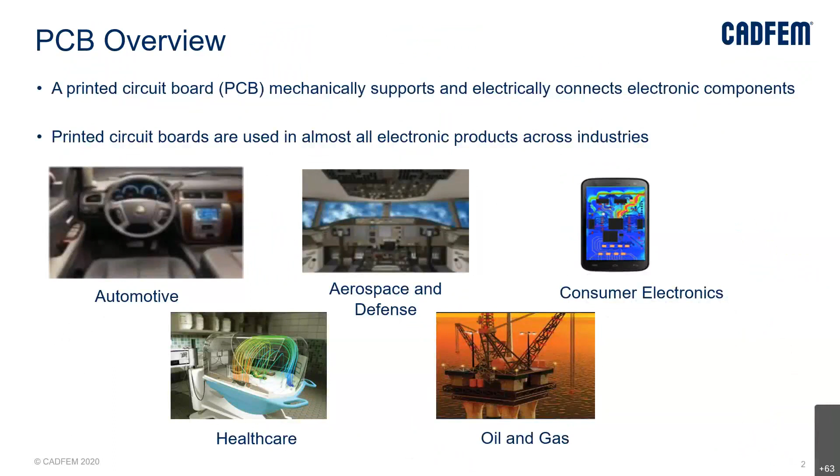So printed circuit boards are used in almost all electronic products. Nowadays, in automotive, aerospace and defense applications, consumer electronics like mobile phones, healthcare, oil and gas, in almost every industry and every vertical you can see printed circuit boards.

So being a PCB engineer, whether an electrical or mechanical PCB engineer, we have to make PCBs reliable. Making PCBs reliable is not only confined to one physics; it has to be reliable electrically, mechanically, and thermally, because PCB complexity is increasing day by day.

Day by day PCBs are becoming more complex. More electronic components are embedded into PCBs, and more complex materials are being assigned. You will find more PCB bodies, solder bodies, chips, semiconductors, capacitors, inductors, more layers, and more complex routing schemes with different via configurations.

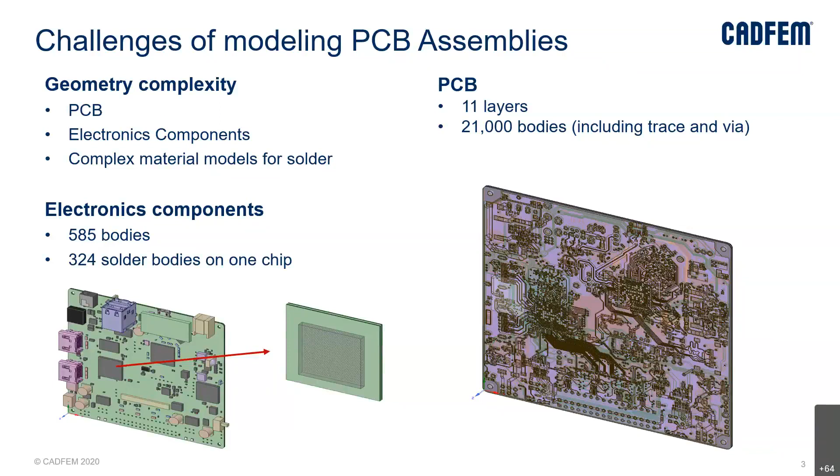That's why it has to be reliable, electrically, thermally, and mechanically. In my presentation I will mostly focus on the electrical reliability of a PCB. My colleague Aslam will talk more on the thermal and mechanical reliability part.

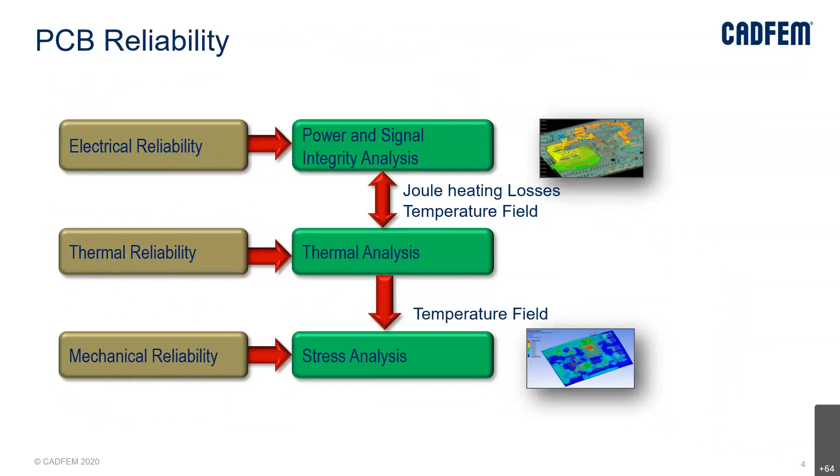In terms of signal integrity and power integrity, in earlier days the clock frequency was very low. Above 100 megahertz we call it the high speed era. When clock frequency becomes high, the signal is attenuated. In the copper traces, the signal would be reflected and distorted, so a number of problems come in a signal.

So to make sure the same signal being transmitted is received, we have to make sure our channel or traces are electrically reliable. That's why we do signal integrity simulation, to ensure that the signal transmission is proper.

Now in a printed circuit board, many active devices are there, like MOSFETs and BJTs. Whenever they switch from logic 1 to logic 0, or logic 0 to logic 1, they draw current or power from the battery. During that process there are fluctuations, also called di/dt spikes, or simply a voltage drop.

So to make sure the power delivery is good, we do power integrity simulation. Improper power integrity and signal integrity give one major electrical reliability problem, known as electromagnetic interference.

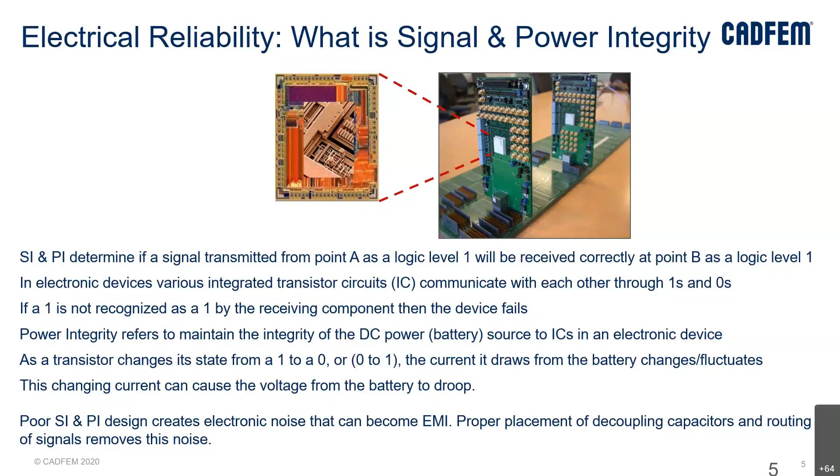Electrical reliability is nothing but electromagnetic interference. Electromagnetic interference is an integration of signal integrity and power integrity, meaning improper signal integrity and power integrity gives electrical reliability problems, which is electromagnetic interference.

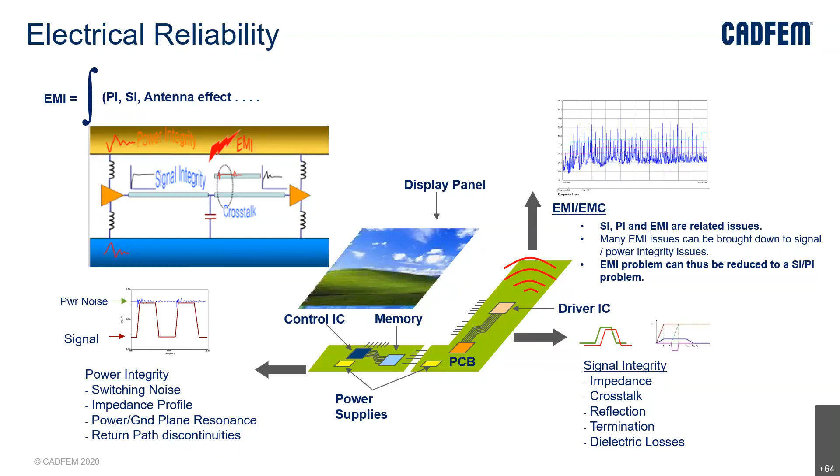There are different simulations in power integrity and signal integrity. In power integrity, we check impedance, noises between power and ground plane, and return path discontinuities. In signal integrity, we also check impedance, do near end and far end crosstalk, reflections, and material losses like dielectric losses. Finally, we do electromagnetic interference simulation.

These are few simulations or techniques that ensure the electrical reliability of a PCB. First is impedance. At higher frequency, the return current follows the least impedance path, meaning wherever impedance is less, the return current will flow there. If impedance is higher, the return current will keep searching for the lower impedance path, and the result would be a larger current loop.

If the current loop is more, from antenna theory it is simple: if the antenna diameter is more, the field effect would be more, the fringing field would be stronger, and the electromagnetic field would be very strong. That's why impedance plays a key role in having better electrical reliability performance.

Some of the fixes are: you can change the stack up, you can change the plane cutouts, and decoupling capacitors can be used.

Hi Prasant, am I audible? Yes, yes, you are audible, Safal. I don't think so. That's what Mr. Suresa is asking me, not audible. Maybe Mr. Suresa, you can just check your audio. Sometimes because of the audio connection you can't be able to listen. I request you to go to the settings in WebEx. In settings there is an option known as test audio, so try to test it. If you can hear some noise, then it's fine. If you can't hear anything, I request you to reconnect your headphone jack. Thank you.

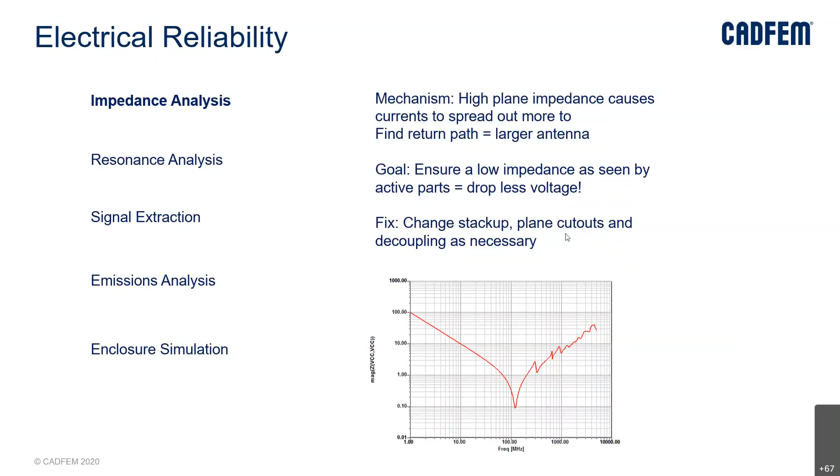So some of the fixes for checking electrical reliability: you can change the stack up, you can change the plane cutout, and you can use decoupling capacitors. This is one example.

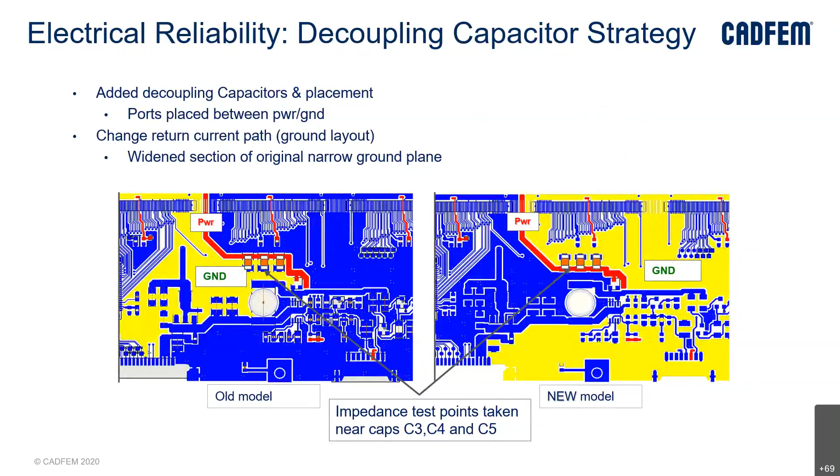After proper decoupling capacitor placement, you can see the impedance of the original layout, which had improper decoupling placement, was quite high and quite noisy. But with proper decoupling placement and improvement, the impedance has been improved.

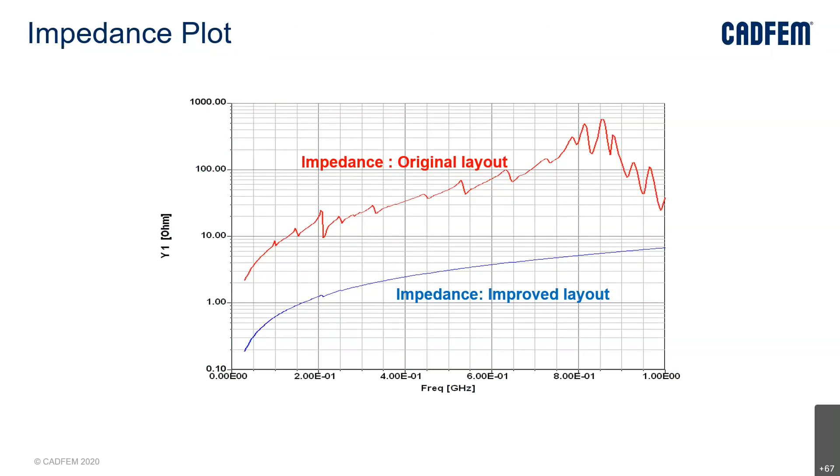So in this simple way, you can improve the impedance profile by simply using stitching or decoupling capacitors. Another simulation technique we call resonant analysis.

In simple theory, a PCB is nothing but a cavity resonator. There is a power plane and ground plane, and between them there will be electromagnetic modes. The electromagnetic energy would flow from one end of the PCB to another end. Now at another end of the PCB, it is an open circuit, and in open circuit, impedance is infinity. So there will definitely be reflections inside the PCB, and that causes the standing wave or resonant phenomenon.

Resonant mode analysis is a very good start for doing EMI EMC simulations, so it's always advised to find the resonant mode in your PCB and try to cure it. It's impossible to make resonance zero, but we can control it using various techniques like decoupling capacitors, changing the stack up, and doing plane cutouts. All these things help improve the resonant mode phenomenon.

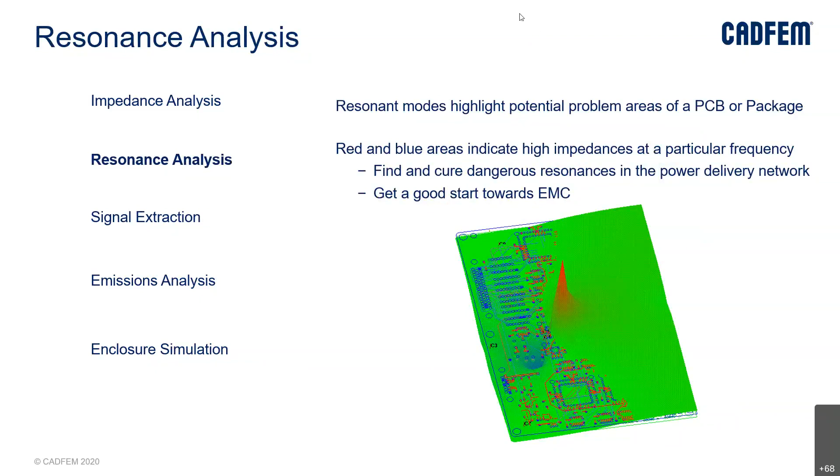Now, after impedance and resonant analysis, the next one is signal extraction. Signal extraction is mostly the time domain simulation, which is nothing but signal integrity simulation, where we run the transient simulation and transmit some bits. So the first step is to extract the PCB, extract the parasitics of the PCB, and then run the transient simulation.

Whenever I say transient simulation, the actual bits have to be designed. So normally people use IBIS and SPICE models for this kind of simulation. If you don't have IBIS and SPICE models, you can model it yourself. You just need to know the rise time, fall time, and so on, and then you can model it and do the signal extraction simulations.

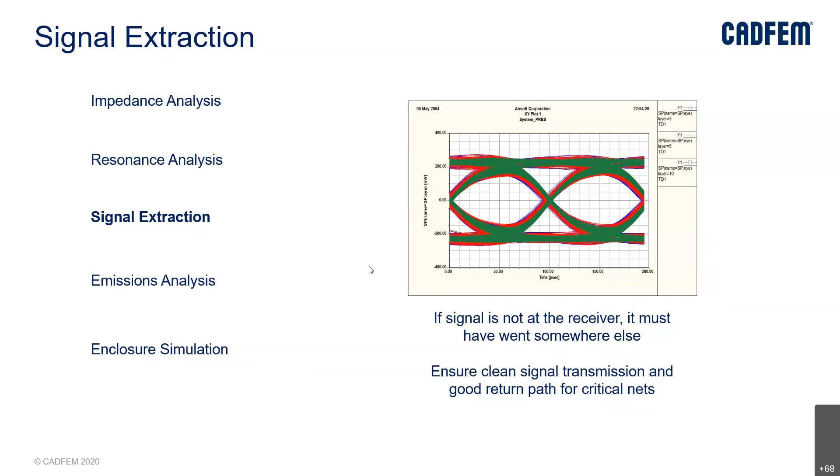So this is just one example. Whenever any signal flows from transmitter to receiver, or any channel, the signal will change its characteristics, meaning it will change its x-axis as well as y-axis, meaning the signal will change its timings. Whenever a signal changes its timings, we call it jitter. In time domain, in frequency domain, it is known as phase noise. Whenever the signal changes its y-axis, we call it simply noise.

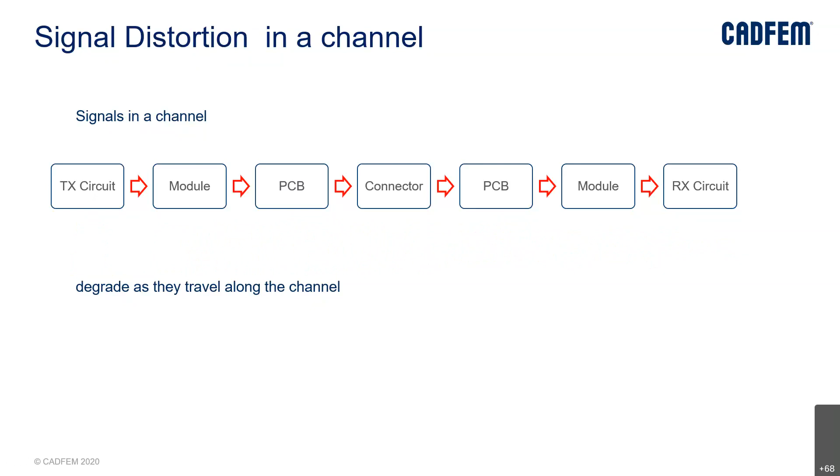So this is the animation, let me just play it. As you can see, whenever the signal flows from transmitter to receiver circuit, the signal becomes different, right? So that means the signal degrades as it travels along the channel. This kind of reliability prediction also can be done.

And you can just reconstruct high-speed channels. You can have your transmitter, multiple PCBs, multiple connectors, transmit circuit, receive circuit, and then you can do the simulation. So this is the near field visualization.

Just one example. At low frequency, you can see there is no field. At high frequency, as you can see, the impedance is also higher. You are also seeing the electromagnetic fields.

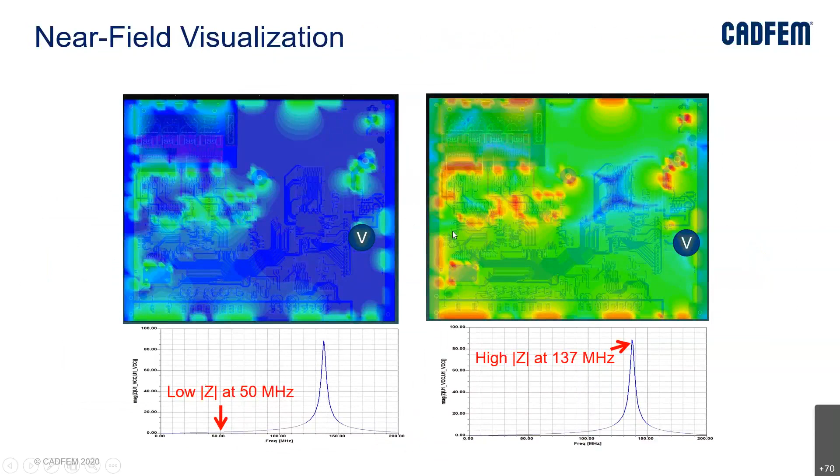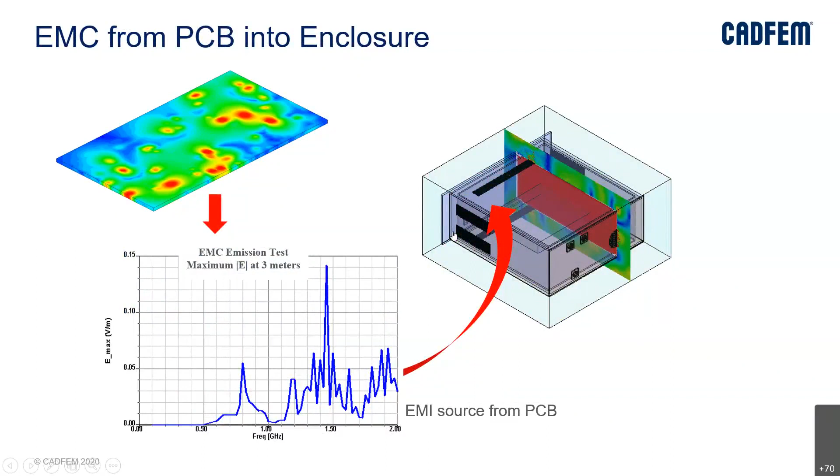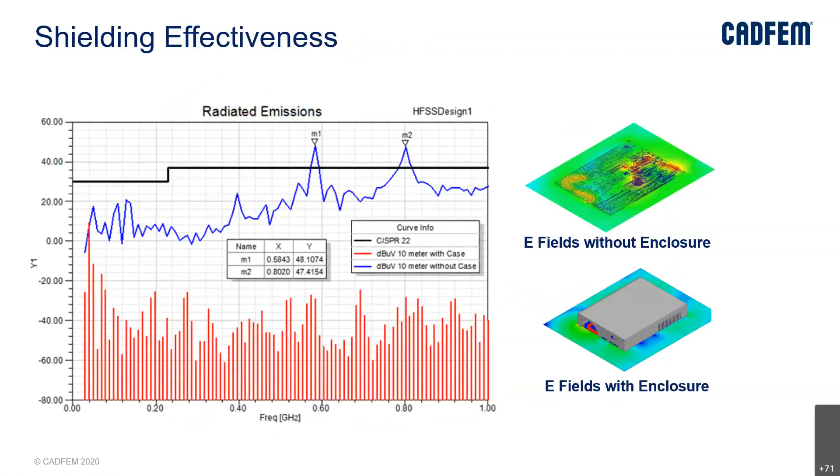And yes, you can also do a 3D enclosure simulation. You can just put the PCB inside a 3D enclosure. We call it shielding simulation, and then you can predict the shielding reliability also, how good the shielding is. As you can see, the top one is without enclosure, the electric field is quite high, and the bottom one is with enclosure, the field has been shielded. So this kind of shielding simulation also can be done.

Now, as I told in the beginning, whenever we talk about PCB reliability, it is not only electrical reliability, but multi-domain or multi-physics reliability. Now, there is a phenomenon known as Joule heating.

So whenever electrical energy flows in a trace, some energy would be radiated out as electromagnetic energy. We call it EMI, or antenna theory. Some energy would couple to the adjacent traces, we call it inductive or capacitive coupling. Some energy would be absorbed by the material, we call it loss, or a lossy line.

And some energy would be dissipated out as thermal energy. We call this process Joule heating. So Joule heating is nothing but conversion of electrical energy into thermal energy, and Joule heating will always be there.

Now if you see from the formula Q equals I square R, in a mobile phone also, whenever you use WhatsApp and all, your mobile phone won't be heated up that much. But whenever you start using the mobile phone in a high performance manner, if you start playing high-end games and all, your mobile will be heated up. This is because of this formula I square R.

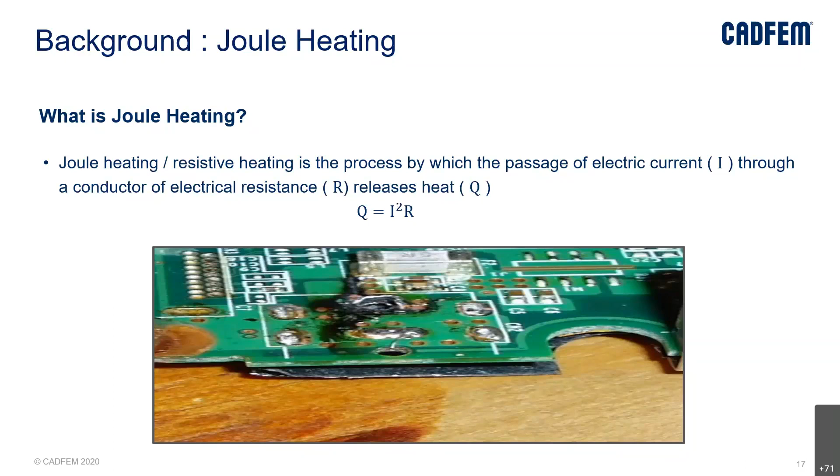Because R is majorly constant, the current drawn from the battery becomes very high if you play games, so the released heat is very, very high. That's why proper thermal management has to be done. That's why a PCB has to be reliable electrically as well as thermally.

Now in the ANSYS platform, we have something known as electrical thermal coupling. So for doing thermal simulation, we need some source, as I said, Joule heating. According to the law of conservation of energy, energy cannot be created or destroyed, it will change from one form to another. So the source for thermal energy is the electrical energy.

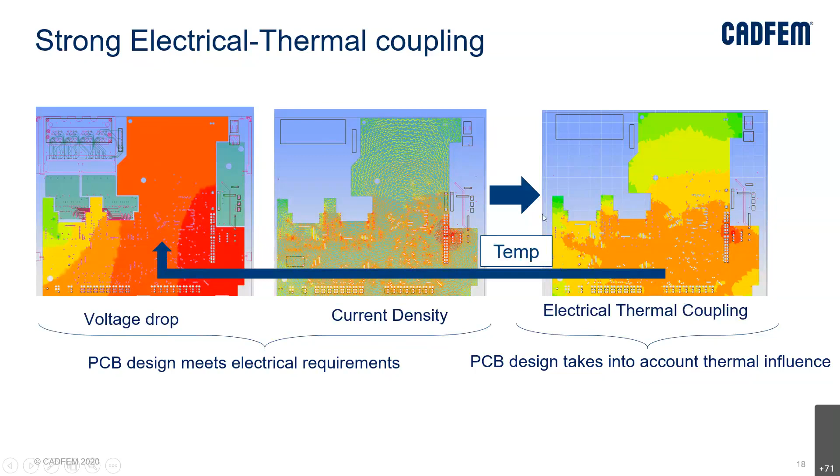Meaning whatever electrical losses occur, whatever power dissipation occurs, that acts as a source for thermal. So in our tool, there is something known as electrical thermal coupling, where you can run the electrical as well as thermal simulation in one GUI, in one platform. The power map or the electrical losses would be taken to another CFD solver, which will compute the temperature. This temperature will be taken back to the electrical solver, which will again calculate the electrical losses considering the temperature also. Now this second result comes.

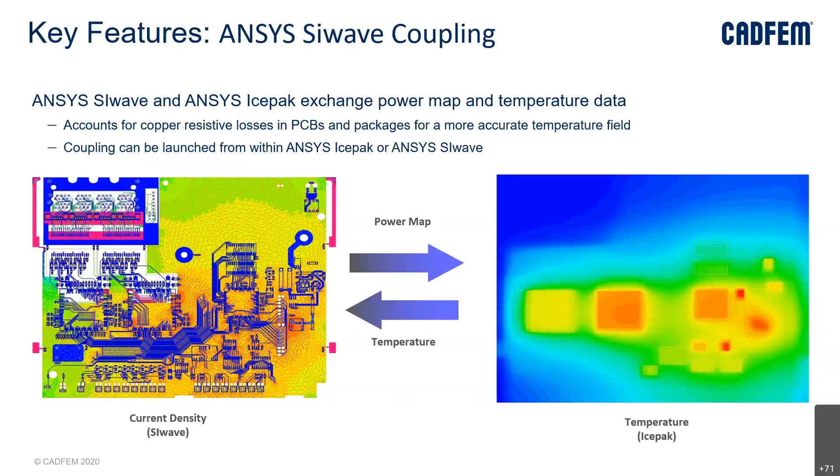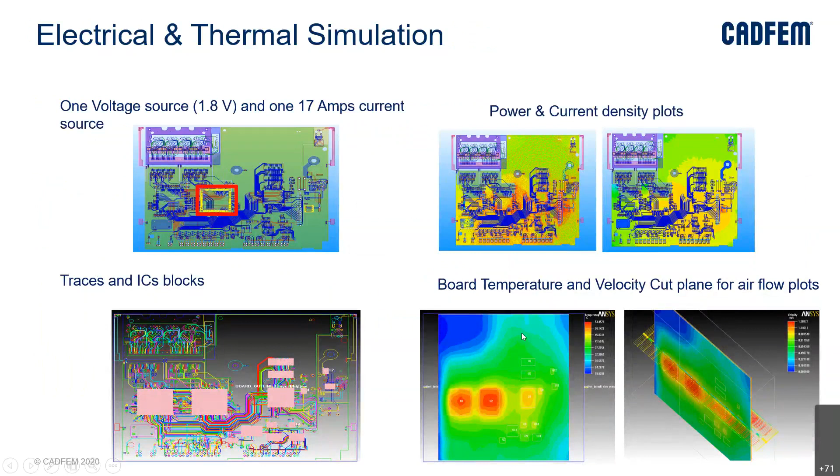The second losses would again be taken to CFD. It will again compute the thermal considering the previous electrical and thermal losses, and new thermal data would be generated. Then it will be taken back to the electrical tool, which computes the electrical losses again, considering the second thermal result. So it is an iterative process; two or three times you can run it to get the electrical losses, overall board temperature, and velocity cut plane. This is one typical example of temperature display.

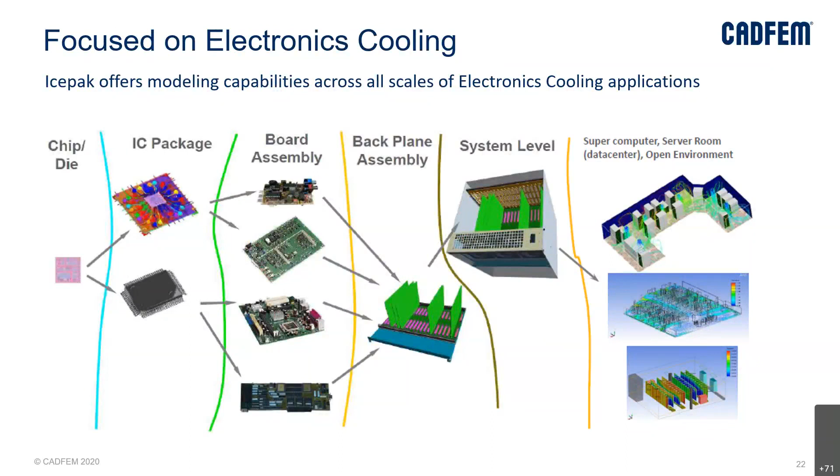We also have a dedicated tool that focuses on electronic cooling. Sometimes excessive heat is generated, so you have to do thermal management, select heat sinks, and so on. Starting from a chip die to an IC package to a board assembly to a back plane assembly up to system level, you can do electronic cooling simulation. Icepak is a dedicated computational fluid dynamics solver, but it has been customized for electronic applications, so you don't need a very good CFD background. Even being an electrical engineer like me, you can do the thermal simulation.

Some features include fluid flow, laminar and turbulent, conjugate heat transfer, conduction, convection, radiation, and Joule heating - all four kinds of simulations can be done. It supports popular CAD import formats and has different macros, predefined fan models, heatsink models, and so on. You can import EDA and ECAD files. There is optimization as well, and now it has been integrated into the AEDT environment, so you can just do the optimization and run the simulation.

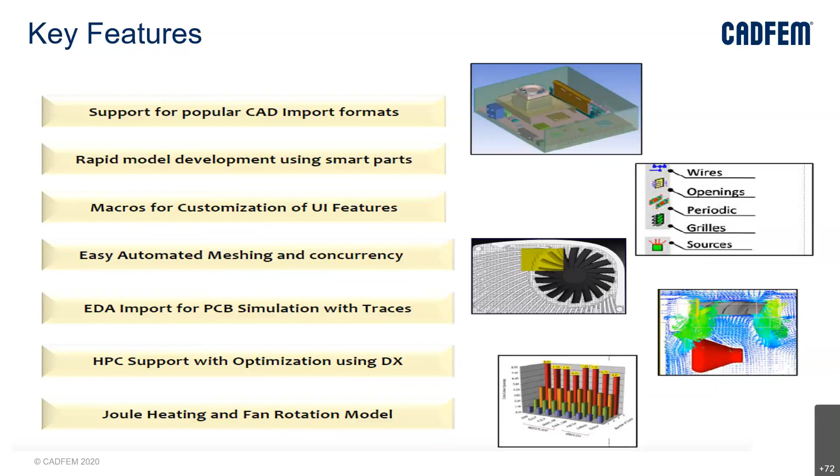As I said, ANSYS is a multi-physics platform. So electrical losses would give thermal fatigue, and thermal losses would give mechanical fatigue - we call it workmanship violations or mechanical deformations. So all these electrical losses can be related to thermal losses, and electrical and thermal losses can be related to mechanical losses or structural deformations also.

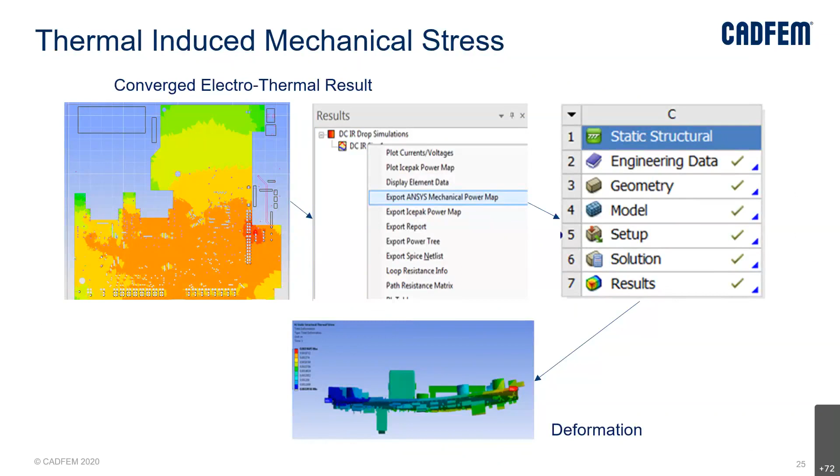This phenomena we call board level warpage. There is something known as coefficient of thermal expansion, or CTE, which decides up to what point the structure will retain its reliability. After the CTE threshold is met, after the temperature surpasses the CTE value, the structure becomes deformed in its shape. There will be different CTE values in a PCB since different materials are present. That's why during PCB fabrication, there are chances that some contacts would be dislocated, some soldered joints would be disconnected, and that's why board level warpage can also be simulated.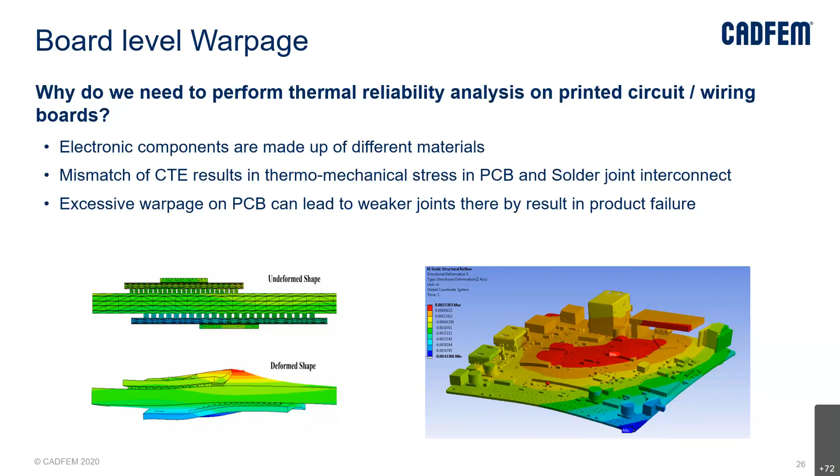Aslam would be talking more on this kind of mechanical simulations. I just want to give a good start for Aslam to take up the presentation now.

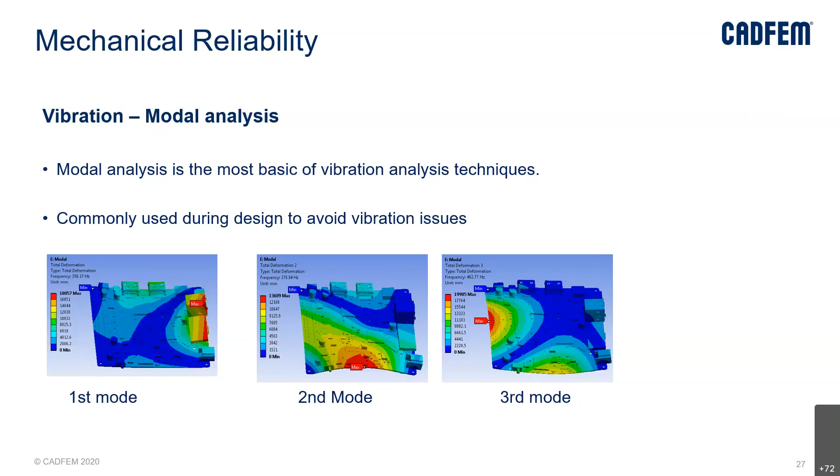Another simulation is mechanical reliability. There is normal mode, also called normal vibrations or modal analysis - the first mode, second mode, and third mode can be done; it's a simple simulation. There is also something known as random vibrations. Random vibration is like my body having some natural vibrations, and the environment also having some vibrations that are random in nature - mathematically we can't actually represent it. But sometimes our natural vibrations can pick up the frequency of the random vibrations; that phenomenon we call resonant mode, or resonant phenomena. So these random vibrations can be simulated in ANSYS mechanical.

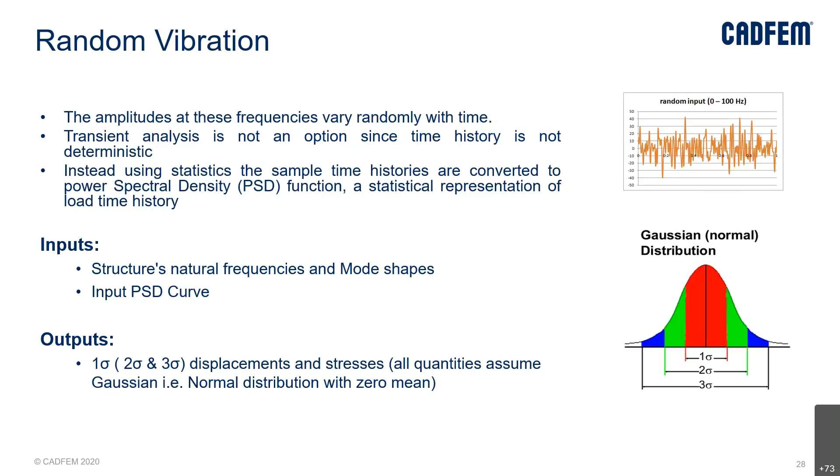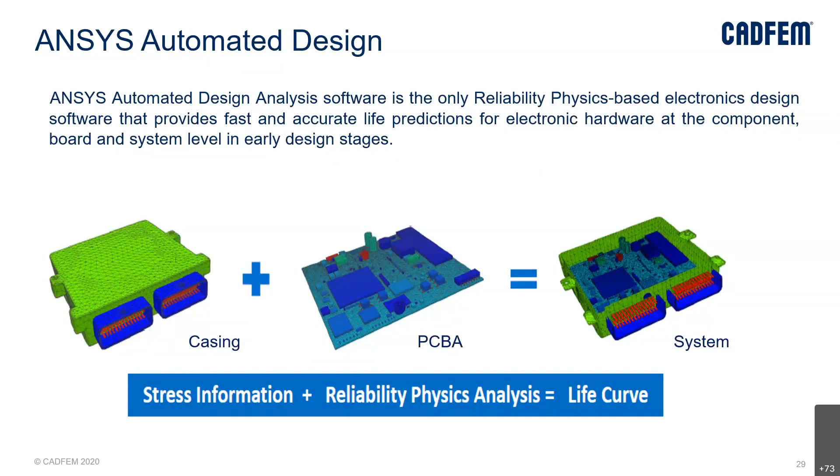You can give input as a PSD curve, and in terms of output, 1 sigma, 2 sigma, up to 3 sigma you can take - it is a Gaussian distribution, and you can check this kind of results. Normally electrical, mechanical, and thermal losses give rise to reliability problems, or what we call the warranty problem, or mean time to failure. So this kind of life curve prediction can be done considering these electrical, mechanical, and thermal losses. Aslam would be talking more about this kind of simulations.

Just to summarize my presentation: ANSYS is one platform where you can do electrical, thermal, as well as mechanical simulation now, as well as reliability prediction.

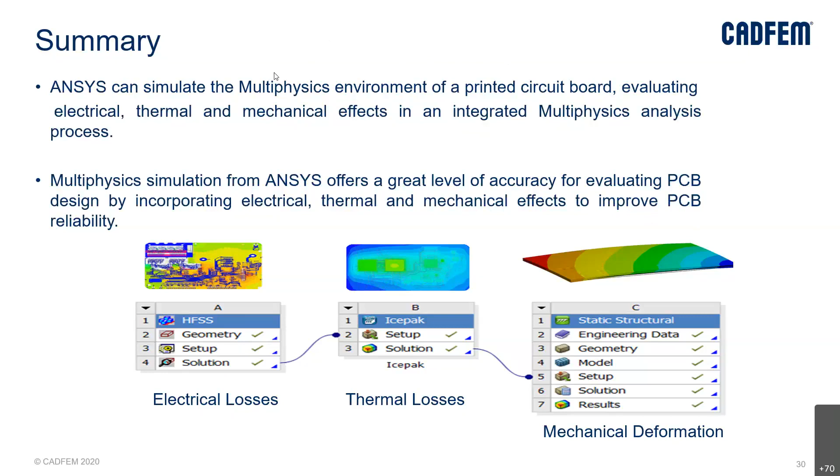Okay, yeah, thanks. Thanks, Safal, for that. Yeah. Okay, Aslam, there is one question related to MTBF, mostly Sherlock. So maybe after you end your presentation, you can address that. Okay, I will address that also. Over to you, Aslam. Thank you. Okay, I am just sharing my screen. Just give me a minute. Can you see my screen? Yes, it is loading. We can see. The presentation view as well, right? Yes. Okay.

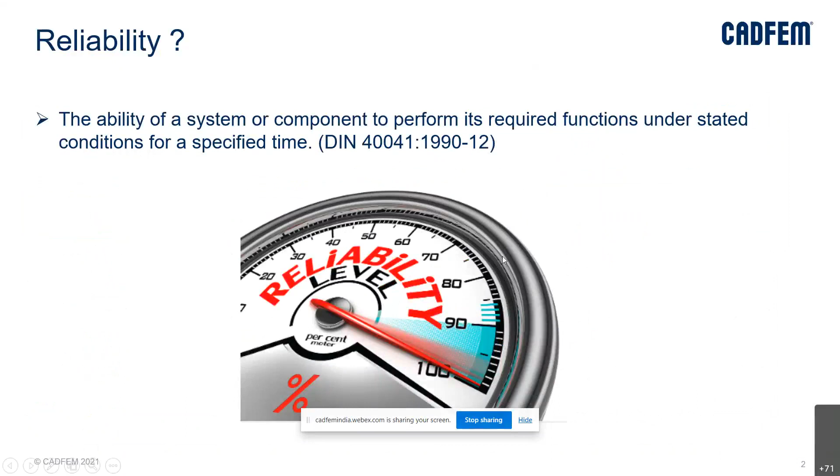So according to the US Air Force... Sorry to interrupt, Aslam. Could you please go to the presentation mode of the PPT? I think I'm in presentation mode only. I think this issue is because I'm just sharing my application. I'll share the complete screen. I have this issue multiple times. If I share the application, the screen will not change. Understood. Now you are able to see it, right? Yes, perfect. Now the slides are changing.

Okay, so according to the US Air Force, out of most of the failures we are seeing, 55% are because of high temperatures and temperature cycling. Not only just temperature, but because of the temperature cycling, the fatigue. Because of that, we saw 55% of the electronic failures, and 20% because of mechanical vibration and shocks. So for this, ANSYS provides a full set of tools to model the entire PCB assembly efficiently to understand the failures.

So for that, ANSYS has its automated design analysis tool called ANSYS Sherlock, which is the solution for reliability analysis. It will translate ECAD easily to CAE files, so it is a powerful preprocessor. Any ECAD you can just convert into CAE files, with some powerful preprocessing capabilities. Also, it predicts product failure, so it has a powerful post-processor as well.

And every engineer can use it easily because it has a very short learning curve and a very good user interface, and you can do design for manufacturability. You can even predict product failure at the component level, board level, or even the system level, with the PCB along with the enclosures.

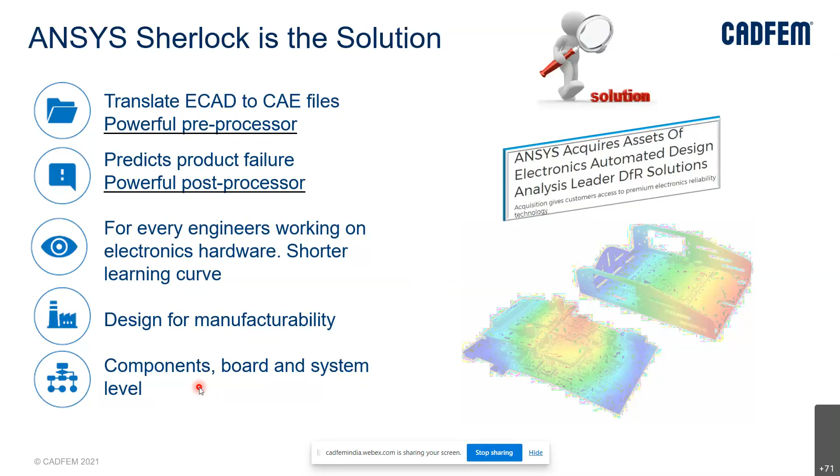So what is the Sherlock? Sherlock is the only physics-based reliability tool which will account for the failure because of your physics, that is, because of your thermal shock and your vibration. It will predict the failure early in the design stage, quickly and accurately, and it is electronics focused, basically used in all electronic industries, whether automotive, aerospace, or any consumer appliance electronics.

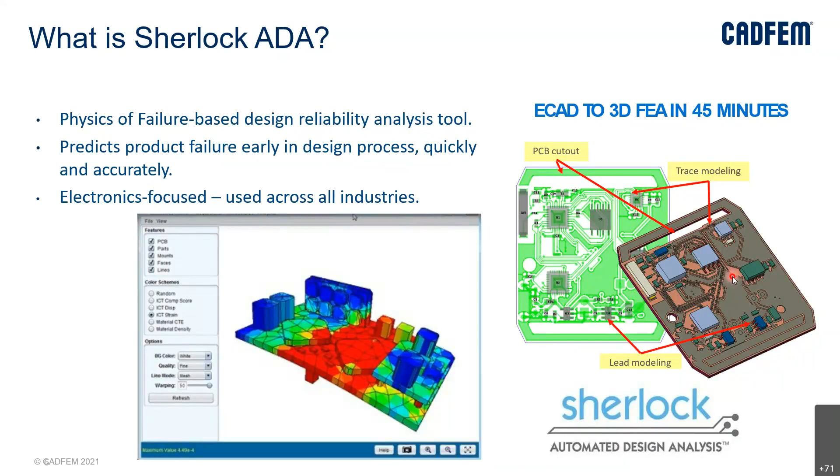So here you can easily convert your ECAD file, which is the layout, say like ODB++ or other formats. You can directly convert it into the CAE or FEM model. I will explain much more about these things in my next slides.

So before going to that, we should understand what are the current challenges we are having in terms of reliability analysis. In the previous presentation, we saw the temperature, voltage, current losses, and how much temperature is going to rise. We saw certain strain bending in the boards. But the information we got was temperature, voltage and strain itself. That doesn't relate with the reliability.

So for that purpose, we have to take that stress information and use the reliability physics analysis to get the life curve, which will explain the reliability of the component or the board for the specified time frame. Reliability physics analysis is an engineering product development methodology that applies knowledge derived from the physics of failure. So we actually take the physics of failure procedure to calculate the life curve.

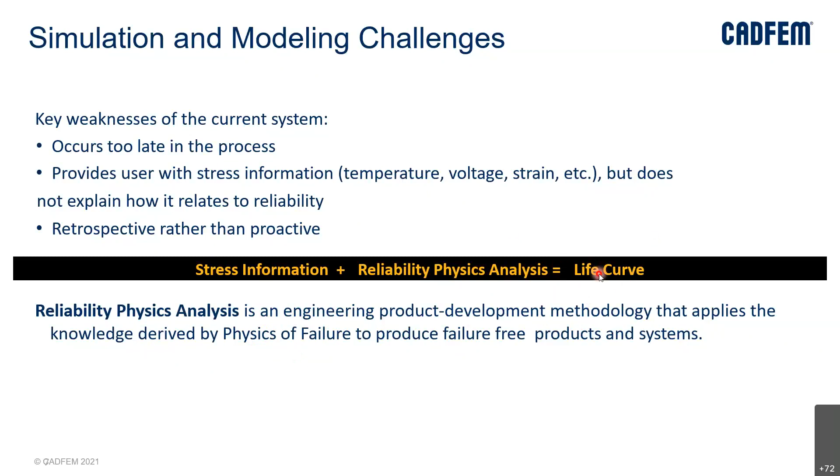So with that, we have three phases to get the reliability aspect in ANSYS Sherlock. One is data input, phase one, where you can easily pass the standard EDA files like schematic, layout, the part list, your BOM, everything you can automatically import into ANSYS Sherlock.

Then with the embedded libraries which we have, like part libraries, package libraries, materials, solders, and laminates for boards, we can use those embedded libraries to model or define each and every part correctly, each package correctly. Then we can easily build a box for finite element analysis in a few minutes. All this comes under the first phase, which we call input, or pre-processing.

Then what analysis can we perform in Sherlock? Basically there are different assessment options with which we can do the reliability analysis. It covers thermal cycling, mechanical shock, natural frequency, and linear dynamic analysis for harmonic and random vibration.

Certain non-FEA analyses are also possible, like integrated circuit wear out, that is, semiconductor wear out, thermal derating, CAF simulations, solder fatigue, or ICT, which is again an FEA-based analysis, in-circuit testing, where you have different test points to check whether a particular load, a force or a displacement coming onto your PCB board, is going to be sustained or not. And along with that, DFMEA, design failure mode and effect analysis.

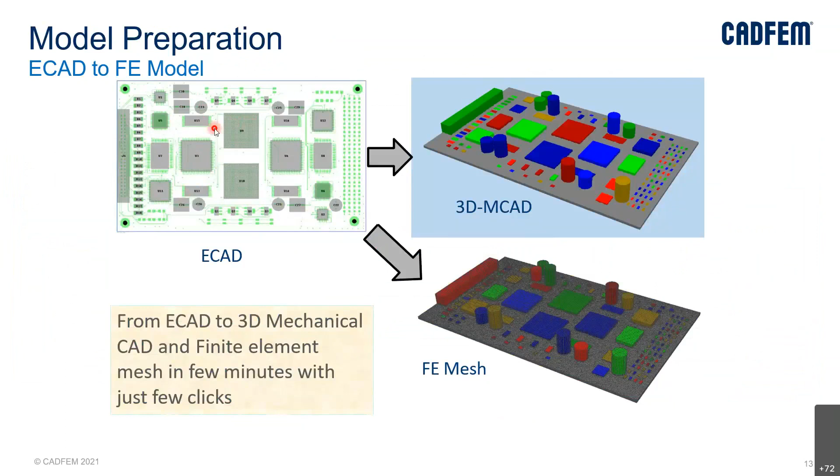Then once we have imported the board, with all the layouts and part locations with respect to part designators, we have our embedded populated library of parts, in which you can check the manufacturer name, and with respect to that you can update the parts according to the part library available in ANSYS Sherlock. So all the material properties which are required to do different analyses are applied there directly and assigned properly.

Suppose you do not find anything there, you can manually change certain properties in ANSYS Sherlock, or you can create your own part library which you can use for further analysis. That way you can create your local library and also use the global part library in ANSYS Sherlock.

So for all the part properties, as you can see here, different part properties are required, like ID, which gives you the designator, and other things like packages. We have a package library as well with respect to surface mount packages or through hole packages. So you can see here you can choose from multiple packages.

Yes, Aslam. So there is a request from the audience for you to speak a little bit slower. Slow. Yeah. Okay, I'm going fast. That is okay. Okay, I'll go through slowly. Okay, thank you.

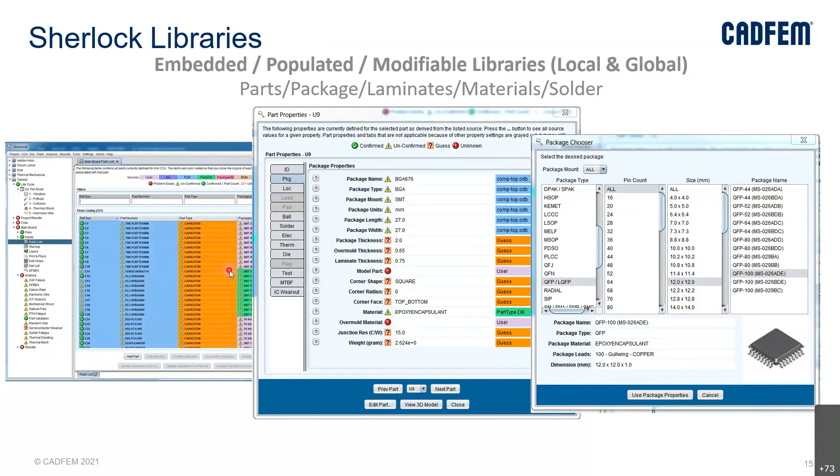Then the next thing: once you create your part library properly and the package dimensions are taken care of, the next important thing is the Sherlock life cycle condition under which you want to test your PCB board. Here we can create multiple shock events. You can define what kind of shock you want to check, whether it's a sawtooth or a half sine, the duration of the shock in milliseconds, and the number of cycles you want to apply over the testing period.

You can also specify the directions. If you want to check different shocks in different directions, you can create multiple shock events and test on all of them. Then there are harmonic events. Similarly, you can create harmonic profiles. You can edit your profile or load your existing profile directly into ANSYS Sherlock, with the duration and number of cycles you want to apply.

Not only shock and harmonic, but also random vibration analysis, which Safal showed in one of the slides, where, for example, during transportation the board experiences random vibrations. You can create that random vibration profile and apply it. So you can create multiple profiles of shock, harmonic, and random as well.

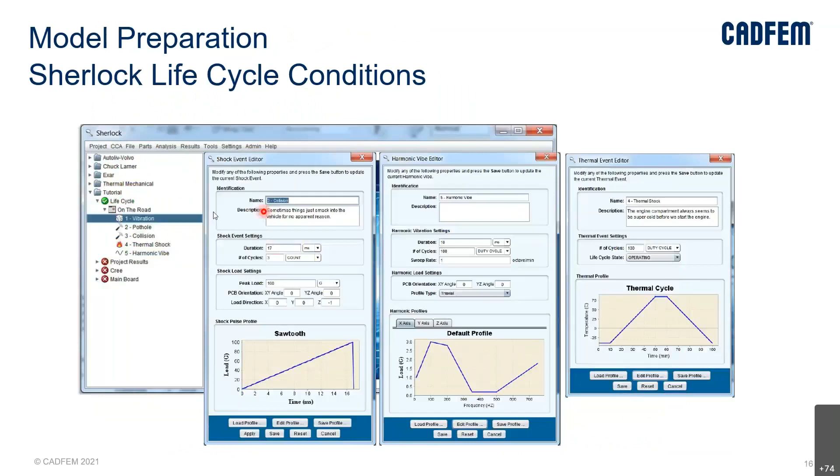You create that one cycle and then apply a number of cycles, say 100 cycles, to your board, and you can check what the strain levels are and what the reliability of your components is under these particular thermal cycles. So these are the life cycle conditions you can prepare here and use for subsequent analysis.

Under the standard capabilities, you can do solder fatigue analysis, which is based on strain energy. The failure is based on the strain energy under the applied thermal or vibration loads. Then you can do thermal mechanical analysis to get the strains at each and every location of your board. At the same time, we can do in-circuit test analysis.

This is a basic, simple structure analysis, in which you have multiple test points on your board. You can apply certain forces or displacements at those locations, and you can check the in-circuit test analysis.

Another non-FEA analysis is the plated through hole fatigue, with respect to IPC TR579. Basically, we have certain plated through holes in the board, which are electrochemically plated with conductive metals. Copper is the conductive material you are going to use, and this is used for electrical connection between the different layers.

So we can do the fatigue analysis of these plated through holes, in which you get the stress calculation first, and based upon the stress we get the strain, and we can determine the lifetime based on the strain which we have calculated under the thermal loadings.

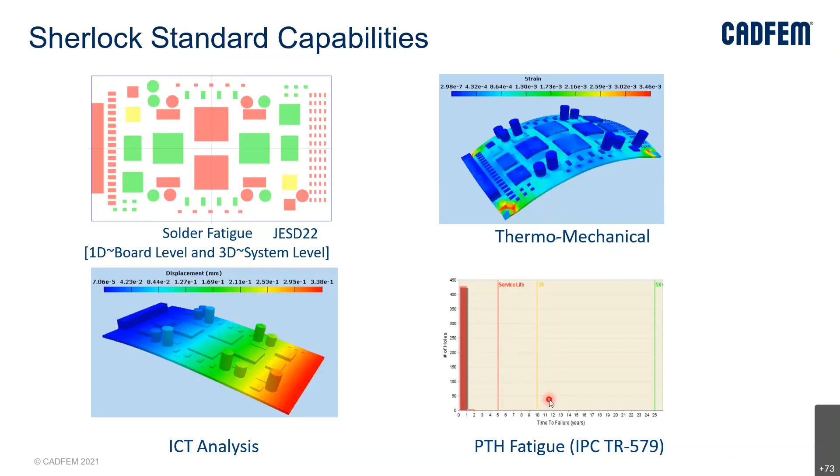Then under the dynamic analysis, we have the natural frequency analysis, which is the most important and basic analysis in linear dynamics, which tells us the natural frequency of our board. Why is natural frequency important? We have our excitation frequency. If the natural frequency of the component matches your excitation frequency, you see resonance and the amplitude of vibration increases. We see failure.

So before going to any other linear dynamic analysis, we must understand what the natural frequencies are, and whether they fall in my excitation frequency or not. And then we can do the harmonic analysis. Basically, it's a frequency sweep analysis where you can define a certain frequency range, and with certain amplitude you can check the harmonic analysis along with a certain MIL standard. So you can use that MIL standard as a reference, and you can replicate that complete procedure

in ANSYS Sherlock itself. Similarly, you can do the shock analysis, under which Sherlock will perform the transient analysis. It will calculate the strain, compare it with the strain limit for each component, and depending upon that it will give you the time to failure for that particular component.

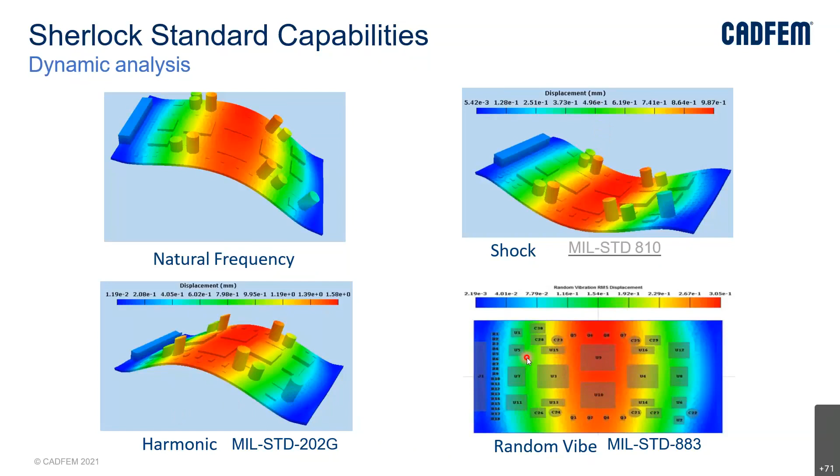Similarly, in the harmonic and random vibration, it will do the linear dynamic analysis, and it will give you the time to failure based upon the FEA strain, which is computed with respect to the harmonic or random vibration loads.

Apart from this, you can even do the conductive anodic filament failure, which is basically the migration of your copper filament within the PCB under the applied bias. Sometimes this conductive anodic filament copper failure occurs. So with respect to IPC-TM-650, you can do the conductive anodic filament analysis with respect to the minimum hole and maximum hole you want to check, and with respect to certain qualifications you can define that in more detail and see the response.

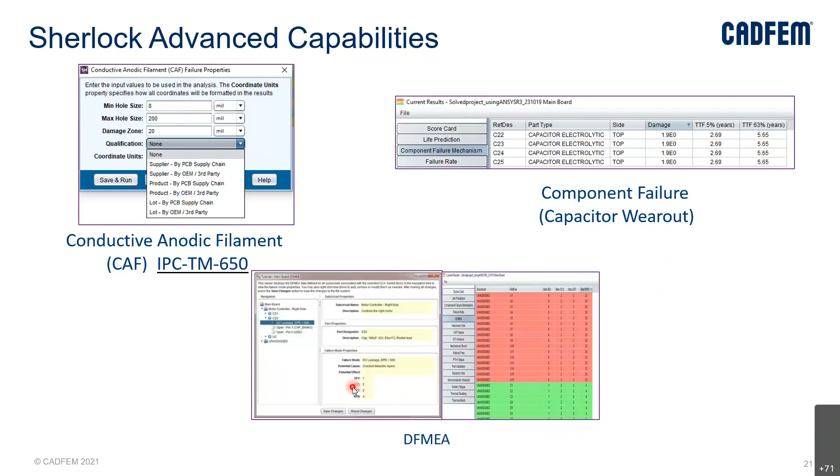Also, ANSYS Sherlock has a capacitor wear out failure capability, currently for ceramic and electrolytic capacitors, and you can do the DFMEA calculations depending upon the severity, occurrence, and detection numbers. After doing all these things, Sherlock will give you the risk priority number for each and every component on the board.

We can also do the semiconductor wear out, IC wear out, with respect to the different mechanisms available. We can take the FIT information from your developer for that particular IC, or we can consider the activation energy for each failure mechanism in the semiconductor wear out, and do it in ANSYS to get the characteristic life and score for those ICs.

Then thermal derating is again a simple analysis where we define the maximum and minimum rated temperature for a particular component, and we check whether it is within the applied thermal loading or not. Apart from these capabilities of the solution, we have other advanced modeling capabilities, under which you can create leads, wire bonds, coatings, or represent potting materials.

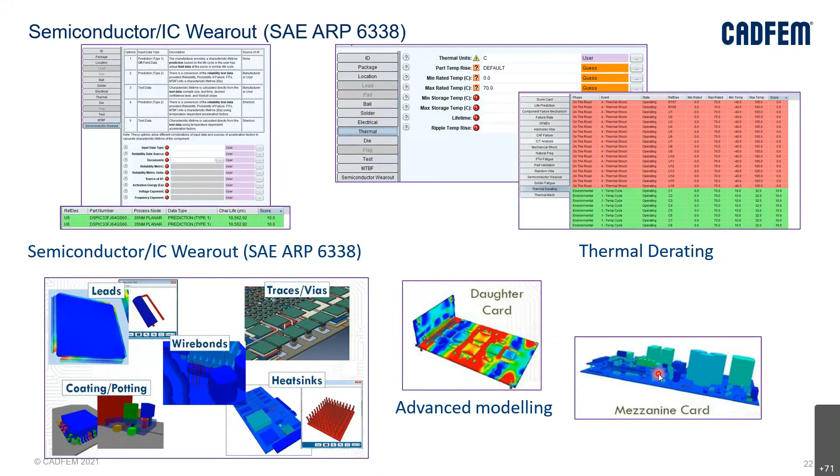You can detail the model traces and vias, or even you can add the heat sinks. Along with this, you can do not just a single board, but multiple boards. Also, you can create the assembly under Sherlock, and you can test multiple boards in the assembly as well. So after doing this kind of assembly, the most important output you are going to get is the life curve.

And ANSYS Sherlock is the only software that provides the complete life curve for each and every failure mechanism. Say initially you define your service life as 10 years and probability of failure 10% as your reliability goal. Then you can apply vibration analysis and check the vibration fatigue. It is showing that after 6 years itself it is crossing the probability of failure of 10%. So certain things we need to change here.

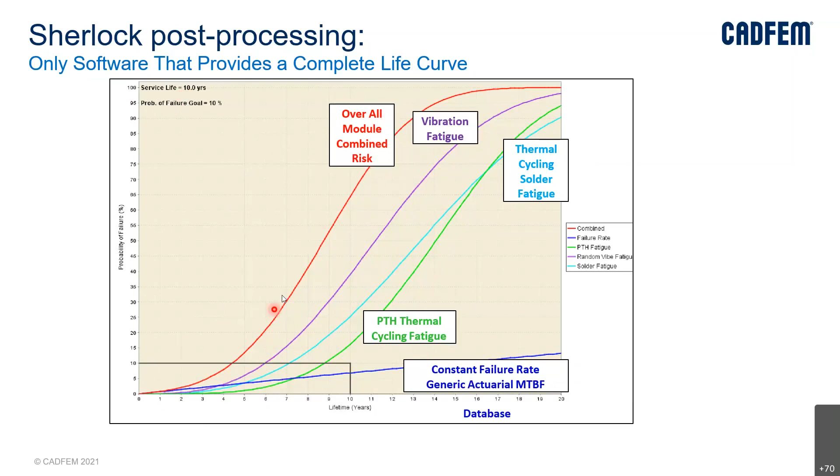So you will get this type of life curve for plated through-holes, thermal cycling, harmonic vibration, random vibration or shock, and at last you will get an overall module for combined risk, which combines all the other events. Apart from this life curve, you can get the summary with the scores of each and every component, whether it is failing and what kind of inputs you have. Then you will get a tabular format of all the components and their scores with respect to time to failure.

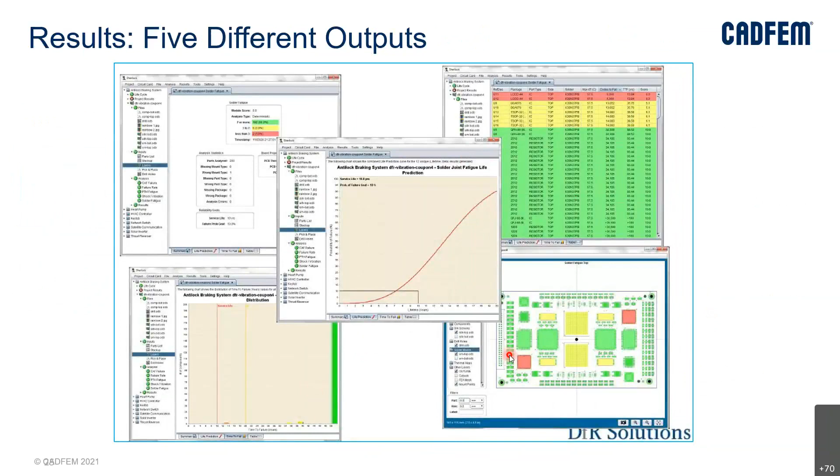The columns here will depend on what kind of analysis you perform, but more or less you will see the strain, time to failure, and the score for that particular component listed in the table. We can also see this through a histogram, and in the layout you can see the scores on each component. You can also see the strains and displacements on the board in the layouts, and check the results in the 3D view as well. So this is the process in ANSYS Sherlock to get reliability by applying vibration and thermal loadings to the component.

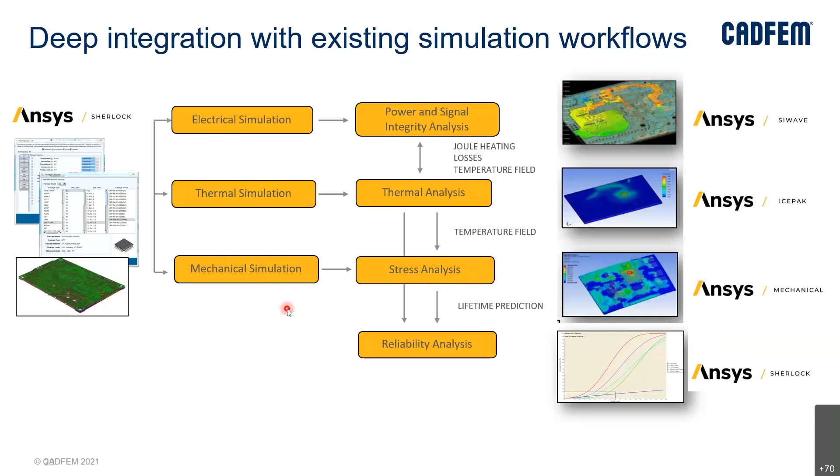We already discussed electronic simulations like power and signal integrity in Safal's presentation. So we have a deep integration of Sherlock in the existing simulation workflow. In many of your electrical simulations you get the Joule heating, through which you get the temperature fields. Then through ANSYS Icepak you get the temperature results, and in Mechanical you see the stresses due to the temperature loading. Once you get the thermal stresses, you can use reliability analysis to get the lifetime prediction. So we have a deep integration of the existing simulation workflow with ANSYS Sherlock.

With that, I wanted to give a case study. Suppose this is the SOC, the system on chip, and we want to choose where to place it. The board must survive repeated mechanical shocks of 30 G for 50,000 times, and we have given the reliability goal of 10 years with 20% probability of failure. We have options to place this SOC here: option 1, 2 and 3.

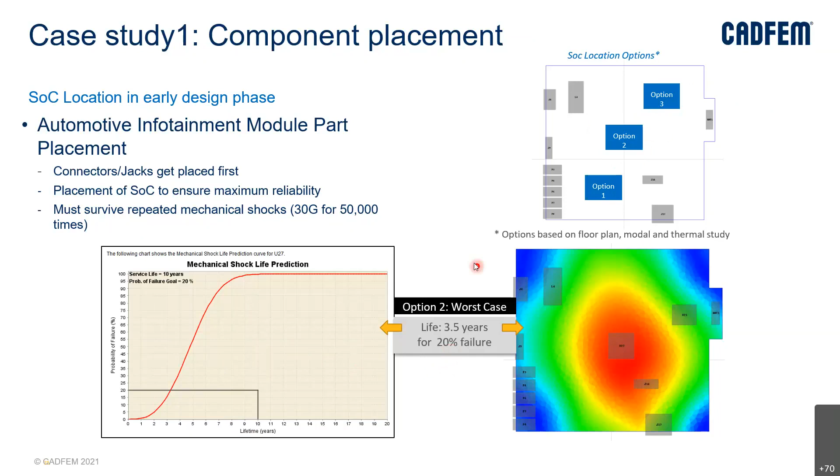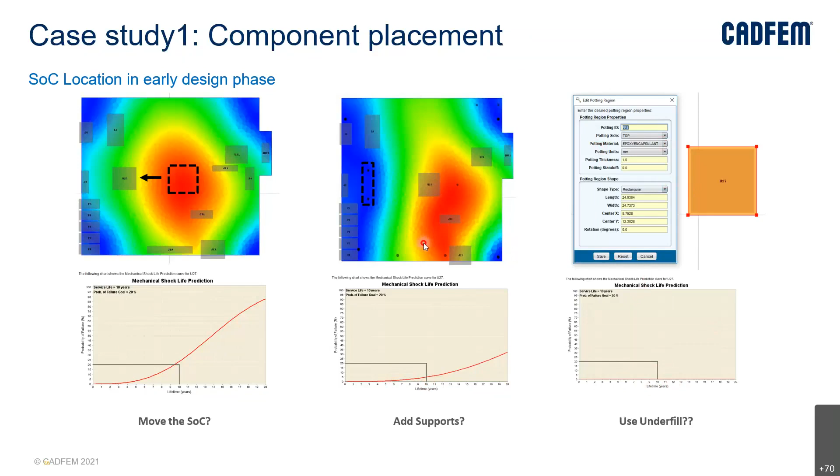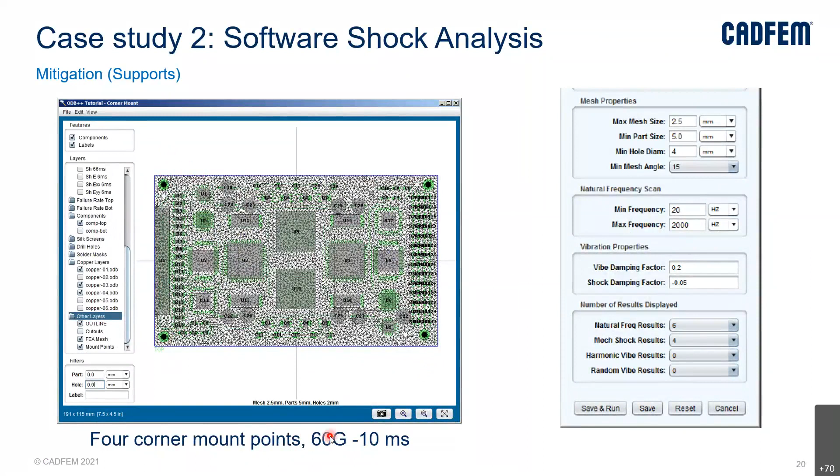Similarly, if I take another example, this is the shock analysis itself. Right now we have the PCB board layout, mounted at four corner locations, and we applied 60G for 10 milliseconds.

If I see the displacement pattern, you can see these are the displacement and strain patterns for this particular loading with four mount points. The strain accumulated at these locations is very high, along with where we are fixed mount location, there the strain is high.

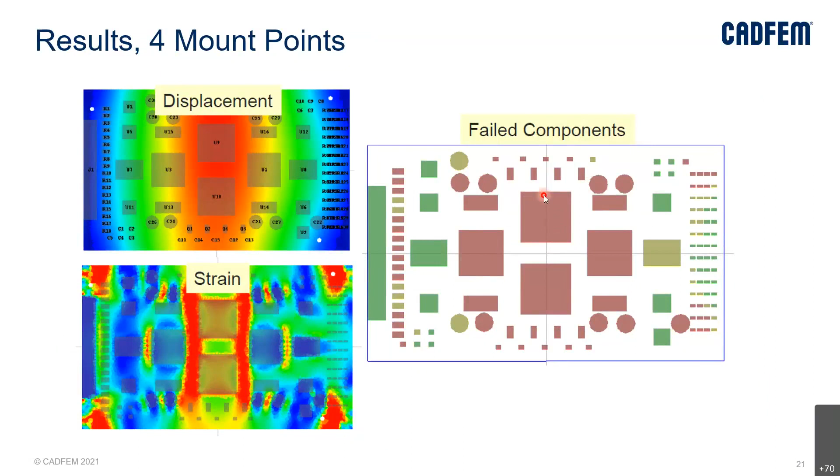You can see the failed component, these are the red areas which we are observing under this particular load. What I can do is add an additional mount location at the center of this.

So you can see my displacement pattern is completely changed. Now it is very less displacement which I am getting, and the strain pattern is also changed. Now I don't see anything which is going to fail for this particular loading condition.

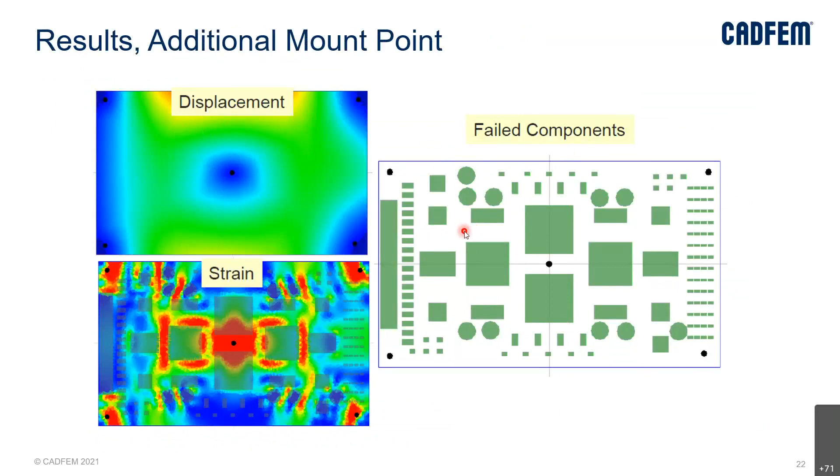For this particular PCB, if we want to add another case study, which is laminate selection. Say suppose because of COVID, we saw procurement issues. If you want to see an alternate laminate material, say you are using Nelco N4000-29 laminate for your board, but now in any situation you are not getting it and you want an alternate laminate.

So what you can do is check with other laminates. What laminate options are available, like we have Isola IS410, IS415, or 370HR. Out of these, which is best suitable for me? So what I can do is certain analysis to determine the selection criteria.

So I wanted to do the plated through-hole fatigue analysis under minus 40 to 85 degrees Celsius temperature cycle. After doing this analysis, with the Nelco laminate under this thermal cycle, the plated through-hole fatigue life I got was 3223.

But if I change to Isola 370HR, I'm getting 11,908. It means I got a 3.7x improvement over my baseline design. So this kind of selection is very easy.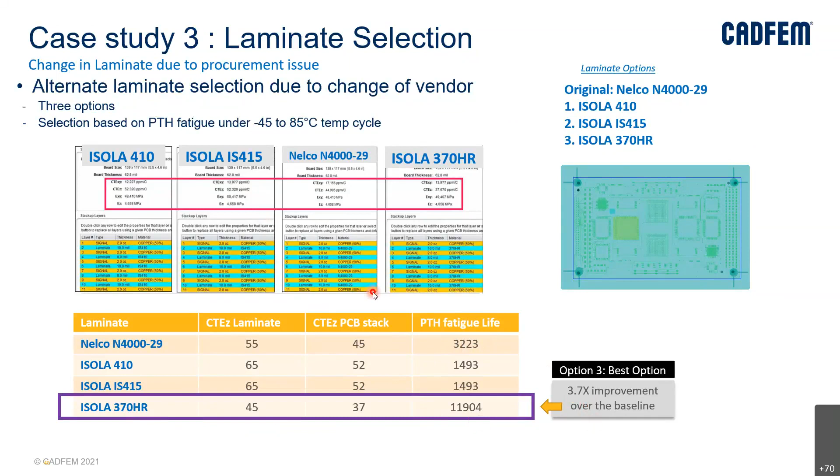If you want optimum selection of your laminate, you can do it through ANSYS Sherlock.

So these are some customer success stories I wanted to share. One is an American auto manufacturer who believed Sherlock could eliminate retesting, reducing engineering time, test cost, and time to market. They actually eliminated the power thermal cycling test - four power thermal tests were eliminated, which saved them 1.4 million in cost.

Similarly, a global storage manufacturer also eliminated two physical tests for each PCBA. They designed 10 PCBAs and eliminated two physical tests for each, which saved them 0.75 million in cost. Apart from cost, their time to market was also reduced by 6 months, meaning their product development time reduced by 6 months.

So these are some customer case studies using ANSYS Sherlock as a solution for reliability analysis. To summarize, we have a tool that is faster to build the electronic hardware for FE analysis, from 2 weeks down to 45 minutes. You can avoid redesign and retest due to failure during constant temperature thermal cycle, power cycling, or mechanical shock.

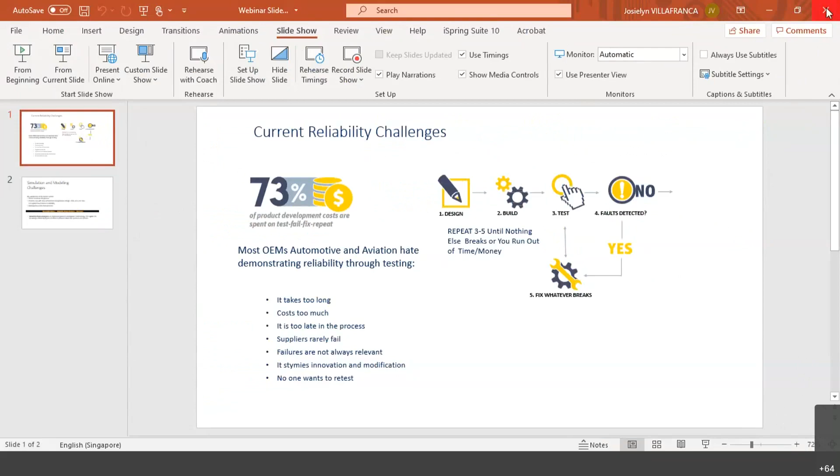Yes, Josielyn, thank you so much for sharing your overview on how ANSYS and CADFEM has engaged with you for doing the reliability analysis of your components. It's great to see that your testing time has been reduced to a greater extent.

Yes, so maybe now, if anyone has any questions, I guess we have many questions coming up in the chat box. Maybe Safar or Aslam, would you like to unmute yourself and answer them, or how do you want to take it up?

Okay, so basically we got one question related to the accuracy and verification. We have verified a few cases with respect to physical testing. If I speak in terms of reliability analysis for shock and vibration, in this terminology we actually use the modified Steinberg equation based on the strain. So we calculate the strain based upon the actual physical FEA based strain, then we compare it with respect to the component's strain limit. That strain limit again depends upon many other factors, like board length, component constant, what is the position, component length, and board natural frequency. So using that equation, the component's strain is calculated, and it is compared with the FEA strain, and the life calculation is carried out for that.